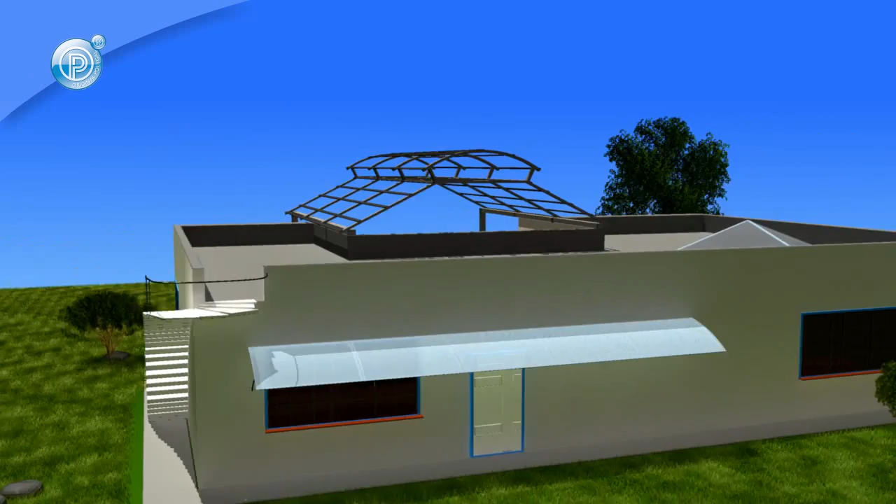When installing Polygal multi-wall polycarbonate sheets, ensure you follow the recommended installation instructions or consult with your local professional. Polygal also offers technical support for your convenience. So let's get started.

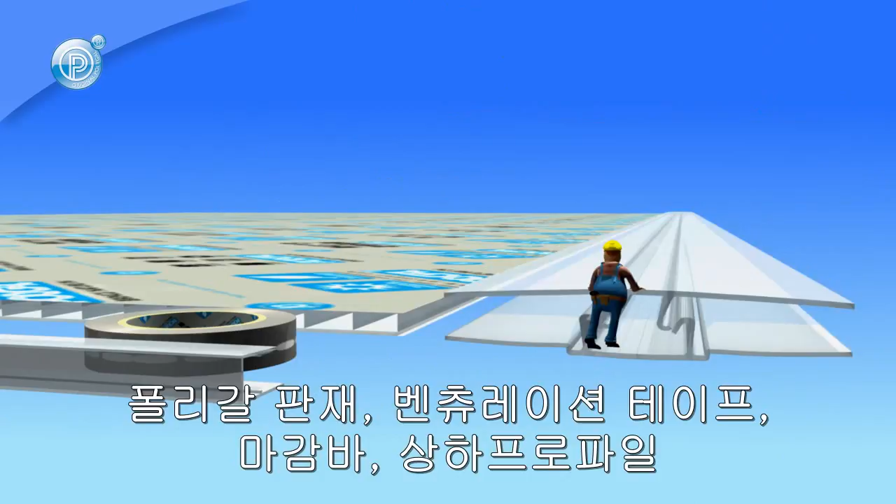Before beginning, check that all of the required parts are present, including Polygal sheets, vent tape, profiles, base and cap profiles, screws, and seals. Do as much prep work as possible on the ground, not overhead. This minimizes excess labor, saves time, and is generally a good safety practice.

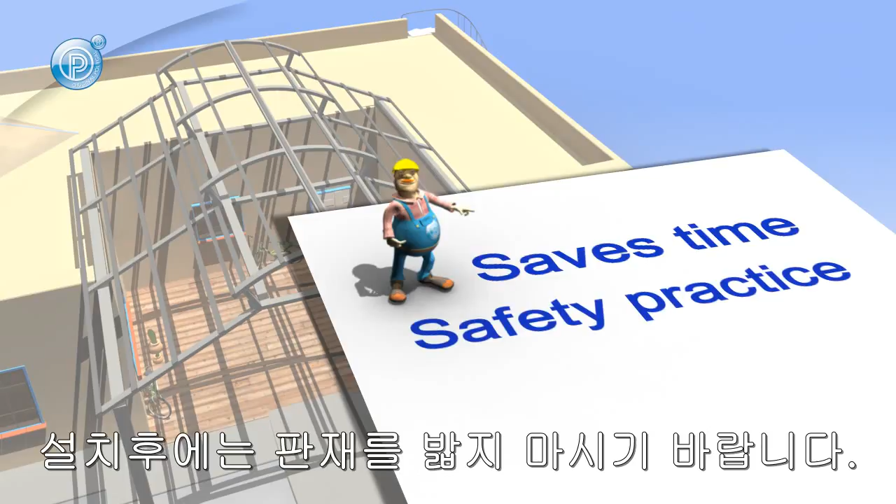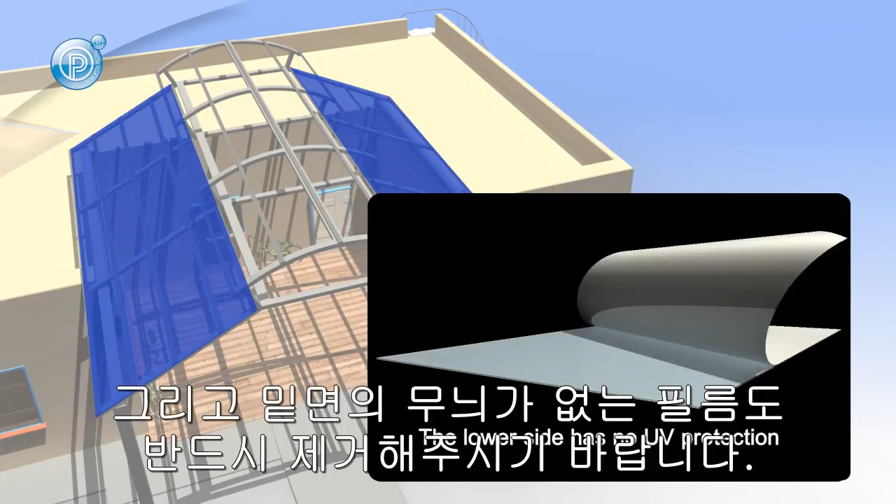Avoid stepping on the sheets after installation, as this is dangerous and can also damage the sheets. If you need to store the sheets and profiles outdoors prior to installation, make sure they are covered with a non-PVC tarp. Polygal sheets are UV protected on one side, indicated by the protective film printed with the Polygal logo, so be sure that this side is uppermost. Be sure to remove the plain protective film from the underside of the sheet.

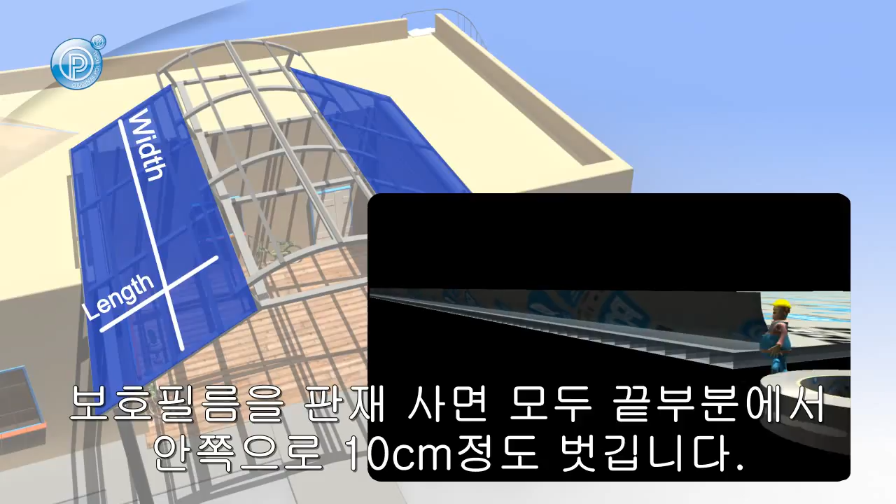Polygal sheets can be cut using a fine-tooth circular saw. Ensure the cut lengths fit the structure with a minimal overlap. Pull the protective film back at least 10 centimeters around the entire perimeter of the sheet and install the vent tape on both ends of the sheet to seal off the open flutes, and pre-drill aluminum profiles if needed.

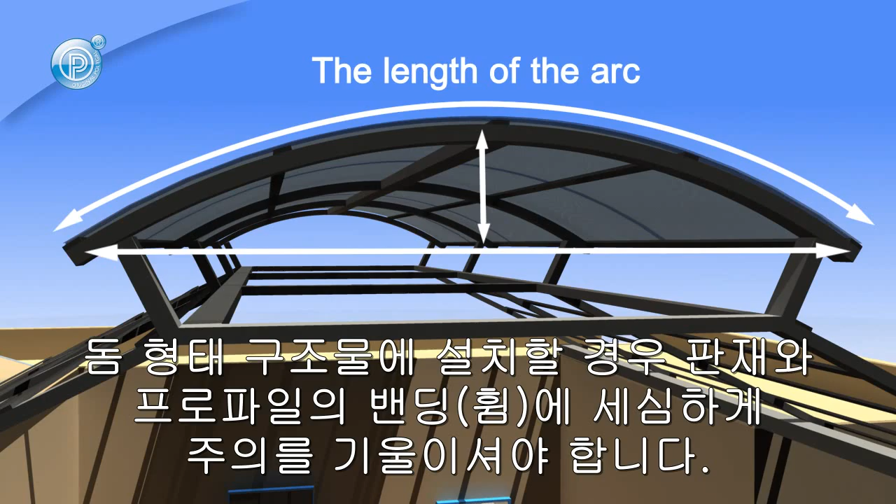If you are installing Polygal in an arched configuration, take into careful consideration the cold bending of the sheets and profiles. Profiles should be cut longer than the sheets. The ends can subsequently be aligned using an electric saw when installation is complete. Ask your local representative or technical support person for the minimum bending radius of sheets and profiles.

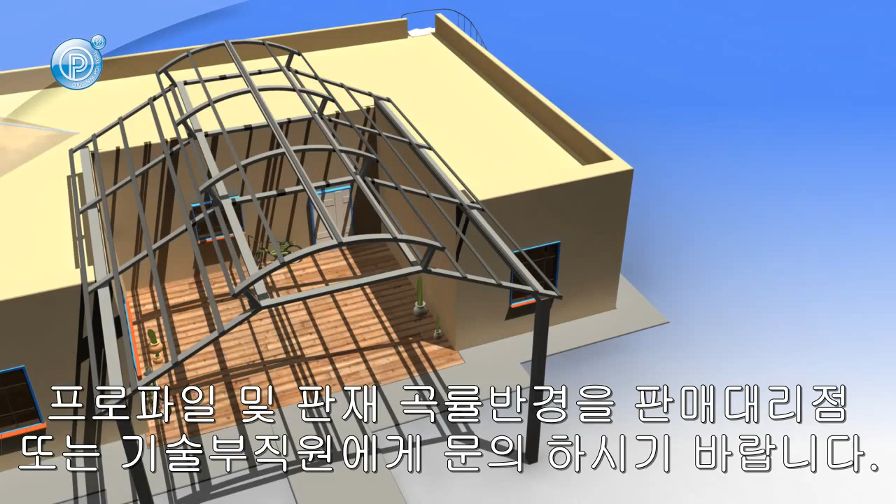When installing Polygal as a roof or canopy system, be sure that your minimum slope is at least 10%. During installation, make absolutely sure the sheet flutes go in the direction of the slope for proper drainage and moisture evaporation. Once installation has begun, ensure proper alignment and placement for subsequent sheets and profiles. Keep in mind that the lower edge of the sheet should project slightly over the edge of the lower joist.

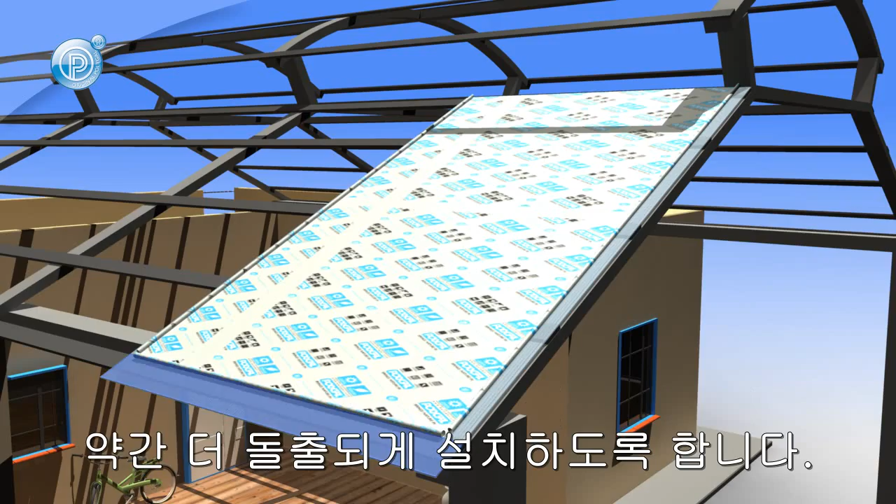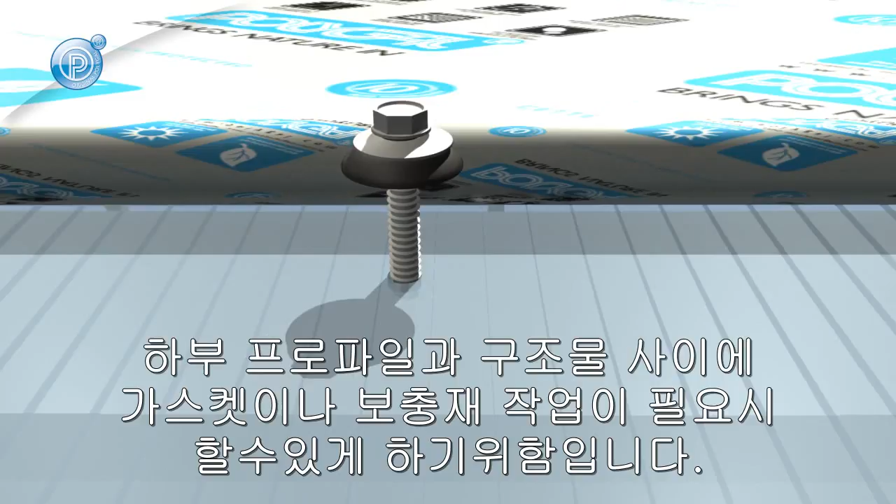The base profile should be fastened to the structure's rafter or purlin supports. Fastener location should be as close to the middle of the base profile as possible when securing it to the structure. Before installing the screws through the sheet into the rafter or purlin, make sure to pre-drill holes slightly larger than your fastening screws to allow for thermal expansion, and also allow for the gasket or spacer between the base profile and the structure if needed.

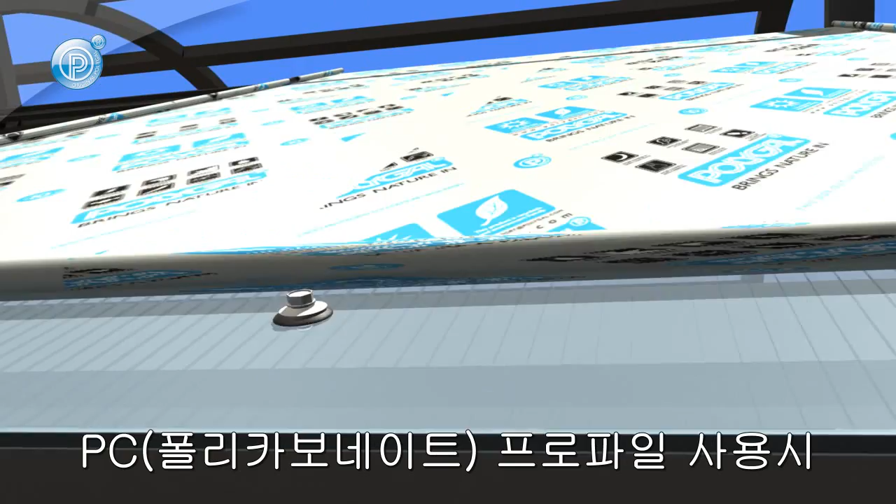After securing the base profile and sheets, the cap profile should be installed. When using polycarbonate profiles, be sure that the cap profile securely locks into the base profile. For aluminum profiles, ensure that the cap is firmly screwed to the base with proper stainless steel, self-tapping screws, and EPDM gaskets as well. Repeat this process until installation is complete and secure.

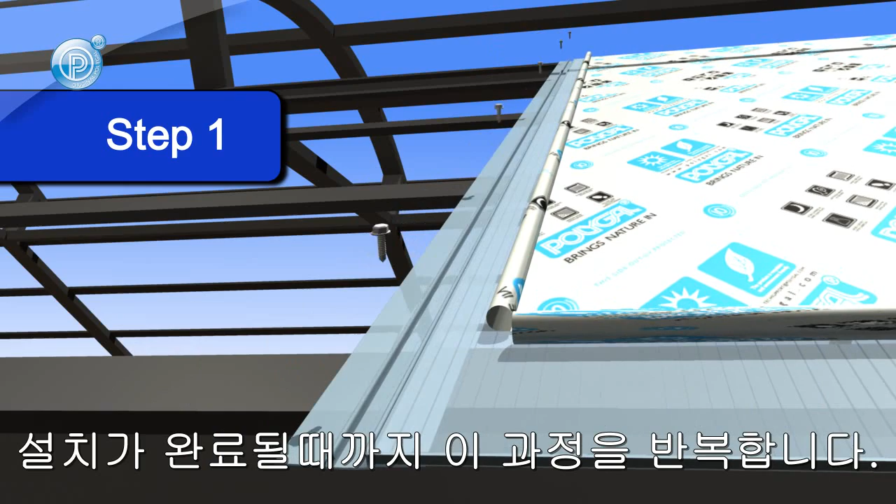The final step in the installation process is to remove the printed protective film as soon as possible.

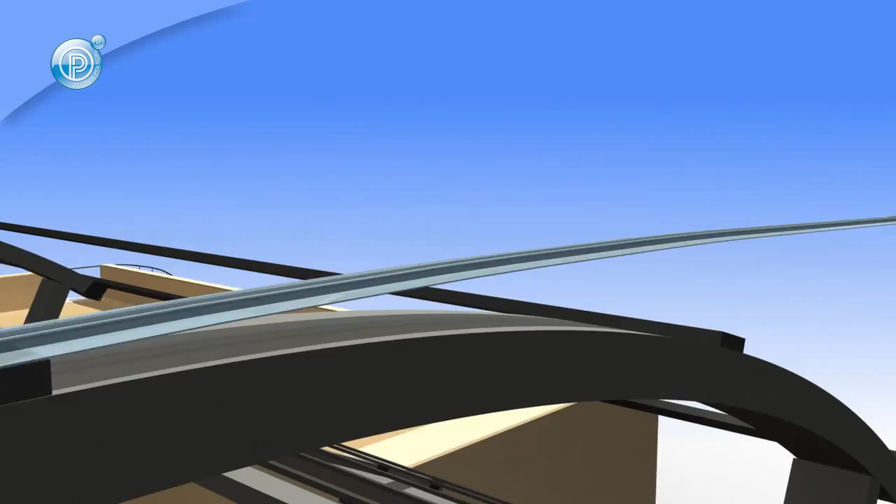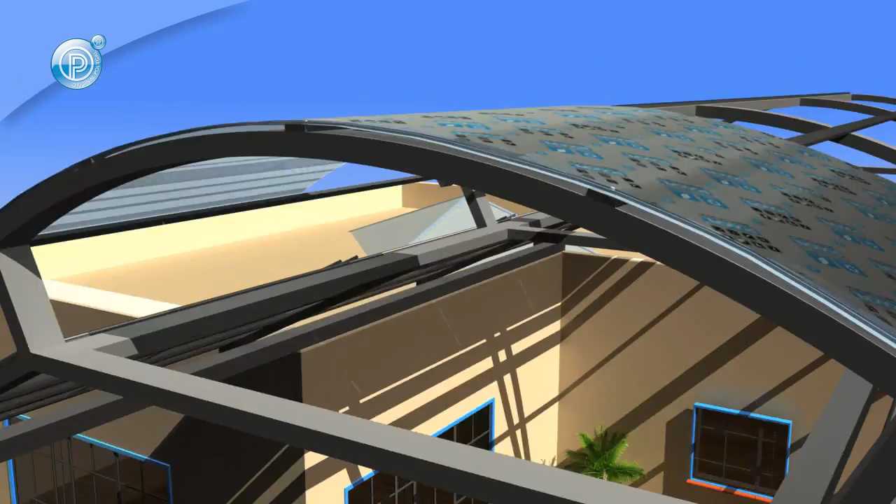Do not leave this film on the polycarbonate, as extended exposure to the sun's rays will make it nearly impossible to remove. In closing, please remember that these are only general guidelines for installing Polygal products and are not a substitute for the detailed installation instructions available on the Polygal website or professional advice from your Polygal distributor.